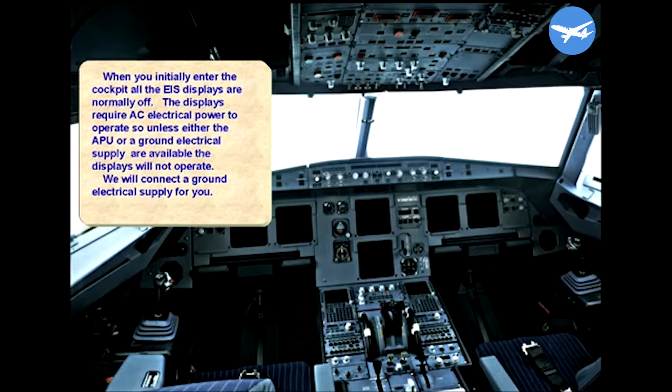Normally, the Ecam screens are switched on in the order of upper, then lower. For training purposes, let's switch them on in reverse order to see what happens. Switch on the lower Ecam display.

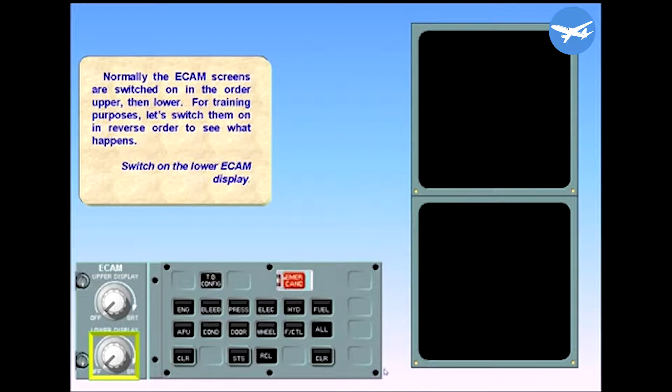Notice that EWD information is displayed on the lower Ecam screen. This occurs because it has priority. Therefore, if there is only one Ecam screen available, the engine warning display information will be displayed.

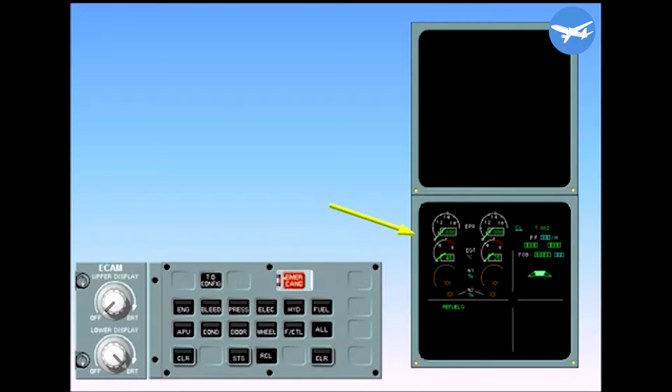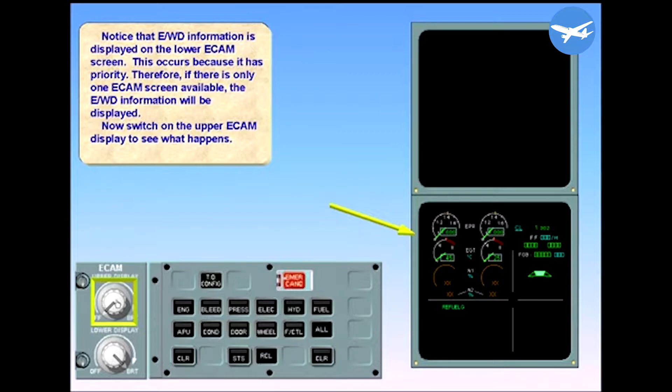Now, switch on the upper Ecam display to see what happens. Notice that the engine warning display information moves to its normal position on the upper Ecam screen, and the door oxy system page is displayed on the lower Ecam screen.

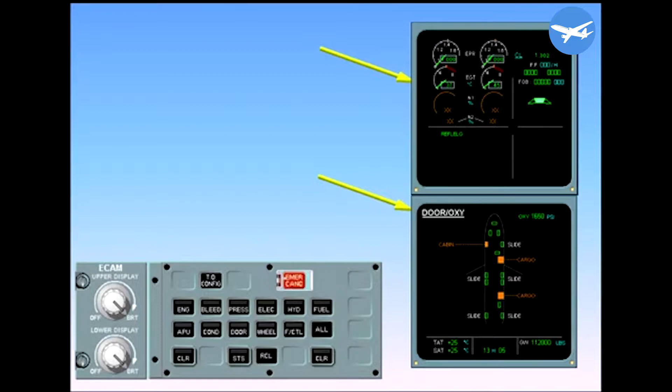The door oxy page is what the Ecam system will automatically display because you are on the ground with the doors open. The memo area of the engine warning display has a message telling you that refueling is taking place.

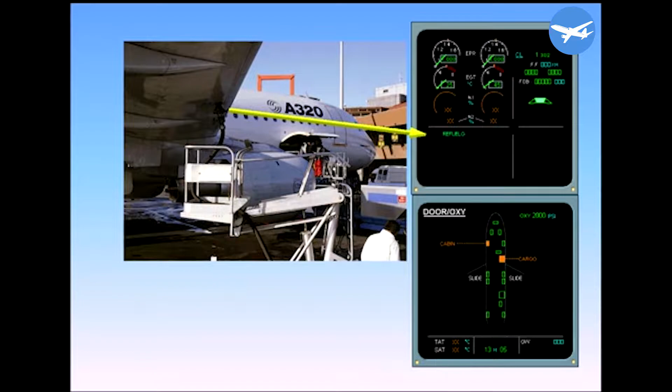We will now start the APU. When the APU master switch is pushed on, the APU Ecam page automatically appears. Next, the start switch is pushed, and the APU begins its automatic start cycle.

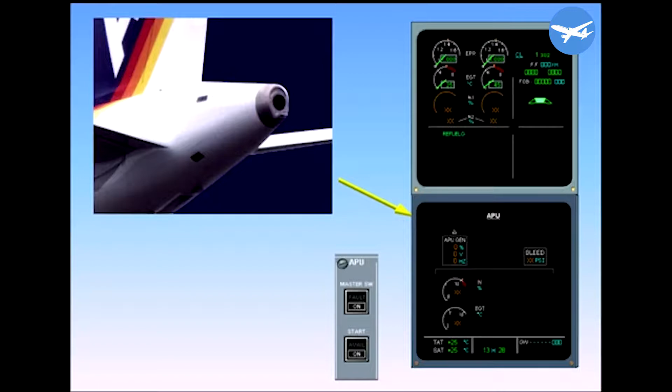Note that there is no light on the Ecam control panel APU push button because the APU page has been automatically called as part of a normal sequence. The APU is now running as evidenced by the avail light on the APU start push button.

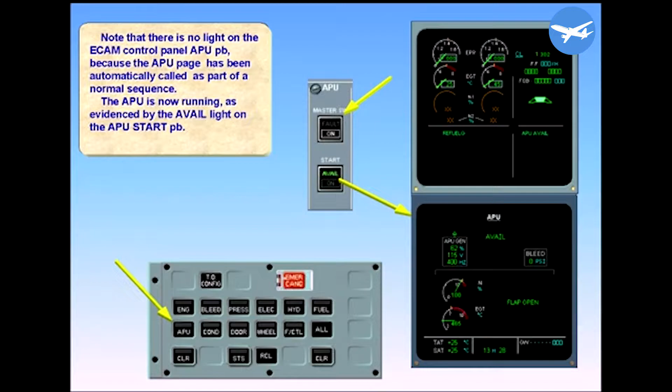Shortly after the APU start is complete, the Ecam door oxy page is automatically recalled.

During the pre-flight, one of the things we do is check fluid levels. For example, the quantity levels for hydraulic fluid and engine oil. The required system pages are manually called by pressing the associated key on the Ecam control panel. Let's call the Ecam hydraulic system page.

The Ecam hydraulic system page is displayed. Notice that there is a light on the hydraulic key on the Ecam control panel to indicate that it was manually selected. You will do the fluid level check in the hydraulic module, so let's see how to return to the Ecam door oxy page.

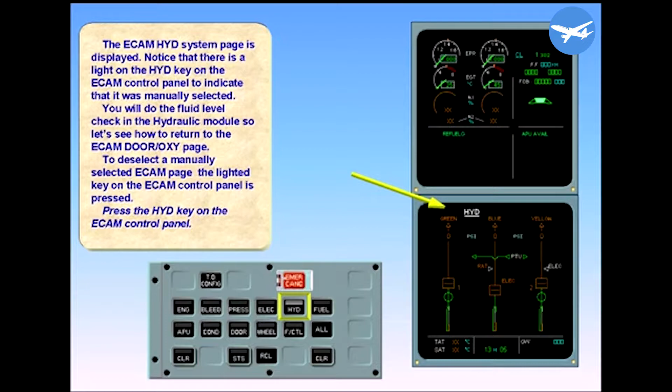To deselect a manually selected Ecam page, the lighted key on the Ecam control panel is pressed. Press the hydraulics key on the Ecam control panel. The Ecam door oxy page is displayed, and there are no lights on the Ecam control panel. Remember the lights out philosophy.

The next action is to press the recall push button on the Ecam control panel for at least 3 seconds. Pressing this push button recalls any warnings or cautions that have been cleared since the last power-up.

Since we are starting the aircraft from cold, a normal memo will be seen on the engine warning display because there is nothing to recall. If we were on a turnaround, the display would recall any warnings or cautions that had occurred on the previous flight. In this example, a canceled caution concerning the digital flight data recorder has been recalled. You will see how a caution is canceled in the Abnormal Operation module.

At this point, the passengers have boarded, the doors have been closed, and the slides armed. On the Ecam Door Oxy page, observe that there are no amber indications and that there are 6 white slide indications.

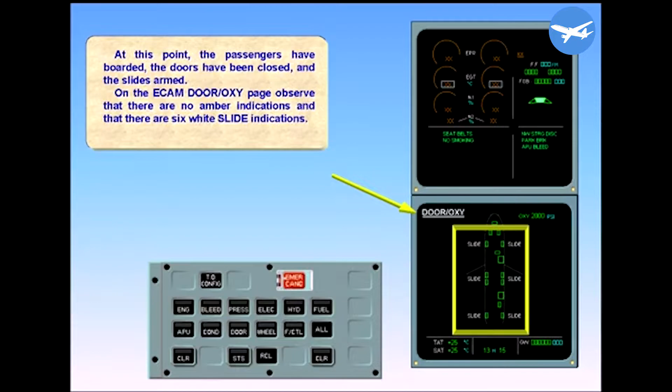When the ground personnel attach a tow bar to the aircraft, they disconnect part of the nose wheel steering system. The Ecam system will detect this and provide a green memo indication, nose wheel steering disconnect. Let's start the engines.

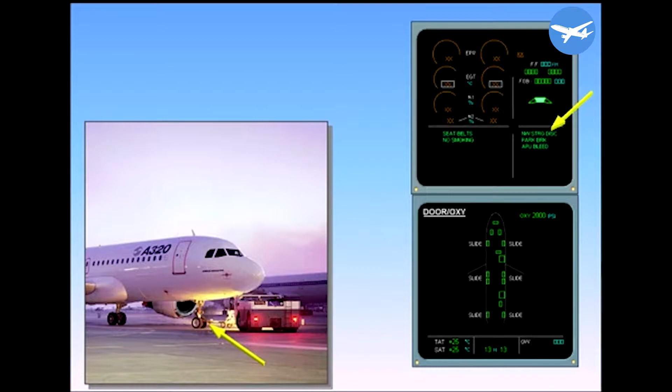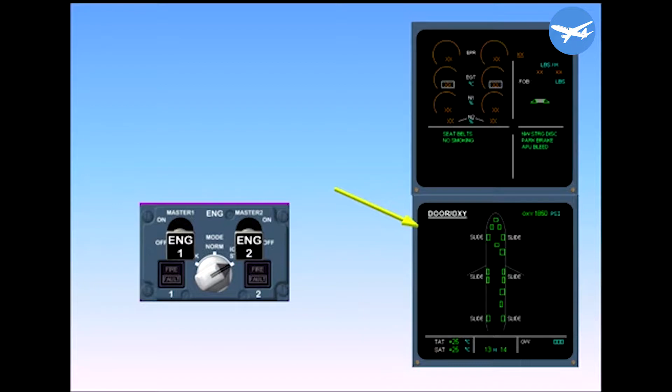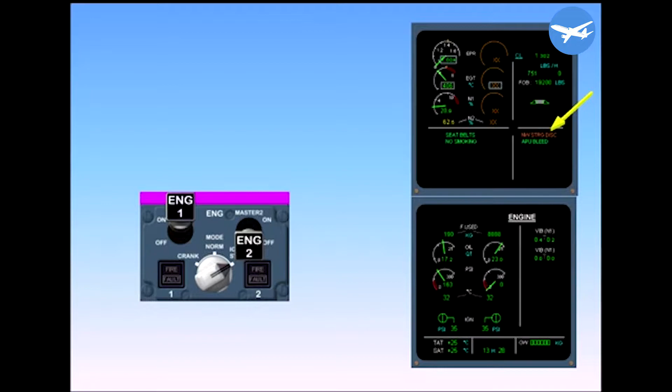The Ecam system will automatically display the Ecam engine page while the engines are being started. Notice that as soon as the first engine is running, the nose wheel steering disconnect memo changes to amber. This happens because Ecam has detected that you are capable of taxiing, but you have the steering disconnected.

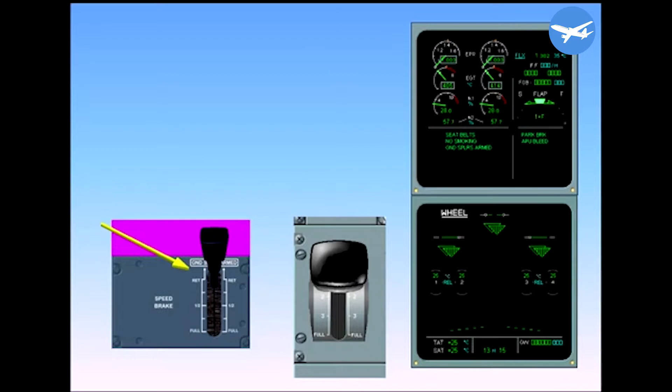When we arm the ground spoilers, a white band appears on the spoiler handle, and a memo appears on the EWD showing that the ground spoilers have been armed. Also note that the flap indicator has changed to show the takeoff flap setting.

Another part of the after-start check involves checking the status page. Since there is no status reminder at the bottom of the EWD, the status page obviously is clear.

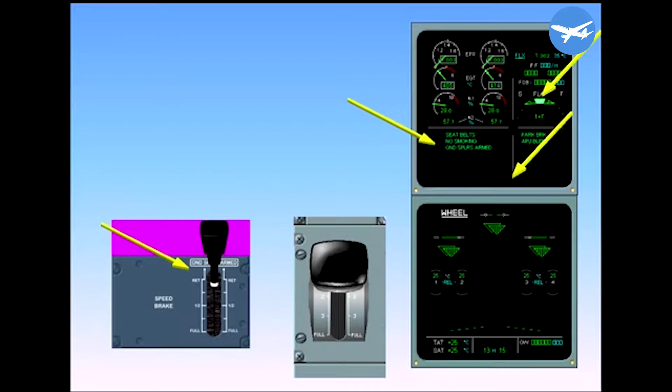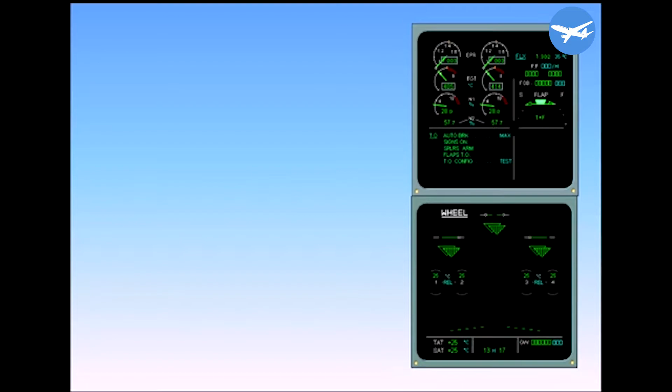Approximately 2 minutes after the second engine has been started, a takeoff memo appears on the EWD. The takeoff memo lists a series of actions to be performed before takeoff. In this example, there are blue action items remaining, specifically setting the auto brake to max and the takeoff configuration test. We will set the auto brakes to max for you.

The blue action item has changed to green. Auto brakes have been armed to max. The final item requires testing the takeoff configuration. This is done by pressing the takeoff configuration key on the Ecam control panel. Select the takeoff configuration key.

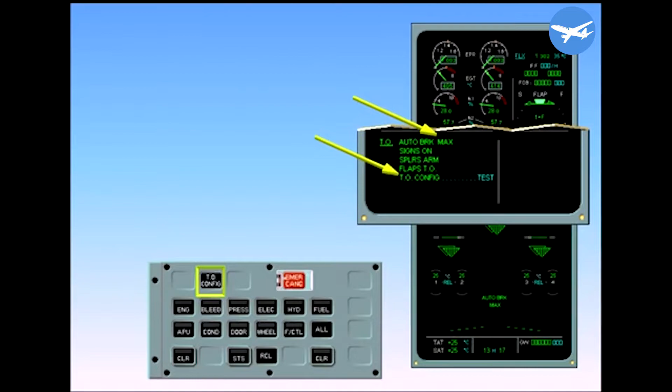Pressing the takeoff config key simulates the application of takeoff power. If the aircraft is not in a takeoff configuration, for example, flaps not in the correct configuration, then an Ecam warning or caution will be triggered. The system also checks the side sticks and the flight control computers for faults.

Provided Ecam detects that the aircraft is in a normal configuration, then the takeoff configuration memo changes to normal. Observe that there are no blue action lines on the EWD.

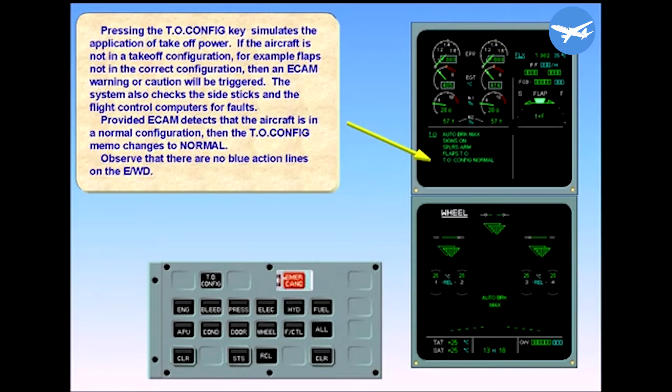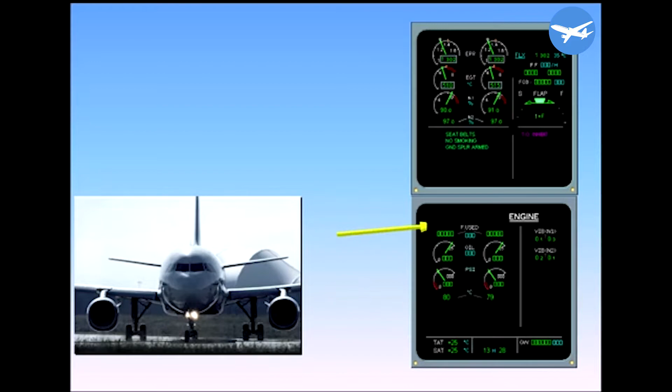We are now at the threshold about to take off. When the engines are set to take off thrust, the Ecam engine page is automatically called. On the engine warning display, notice that the takeoff memo is replaced by normal memos.

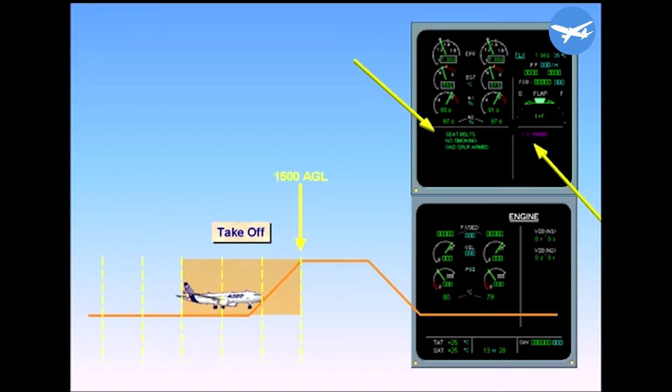A magenta takeoff inhibit message has appeared. The takeoff inhibit message is advising you that some warnings and cautions have been inhibited during the takeoff phase.

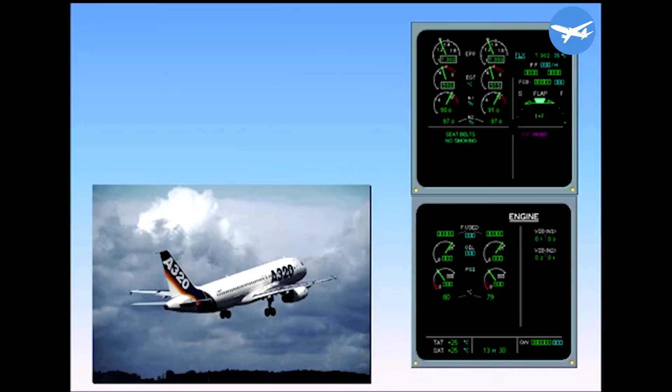The aircraft is now airborne. After passing 1,500 feet AGL, or 2 minutes after liftoff, the takeoff inhibit ceases and the memo is removed.

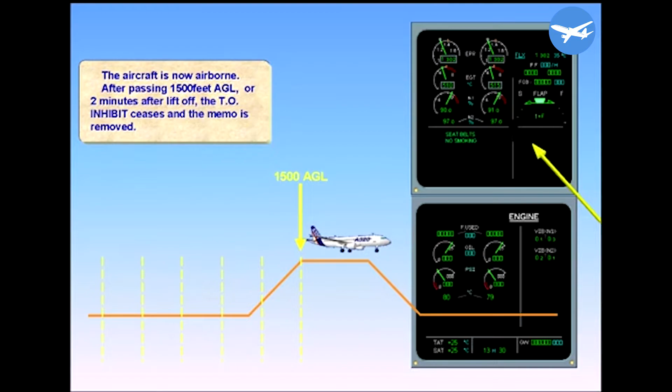When the flaps are fully retracted, the ECAM engine page is automatically replaced by the cruise page. When established in cruise, the system pages are periodically reviewed.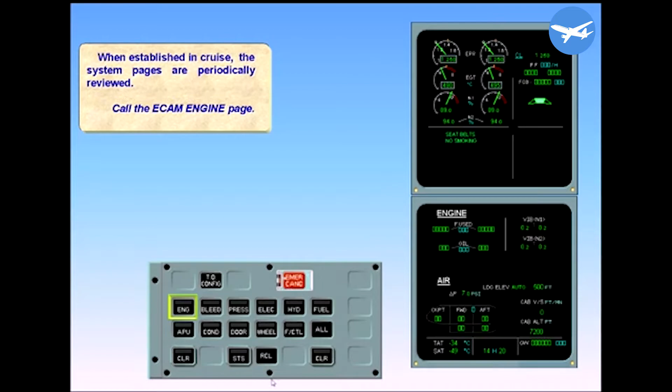Call the Ecam engine page. Notice that while the engine page is displayed, the corresponding light on the Ecam control panel engine push button is illuminated. You will study the indications on the system pages in the appropriate modules.

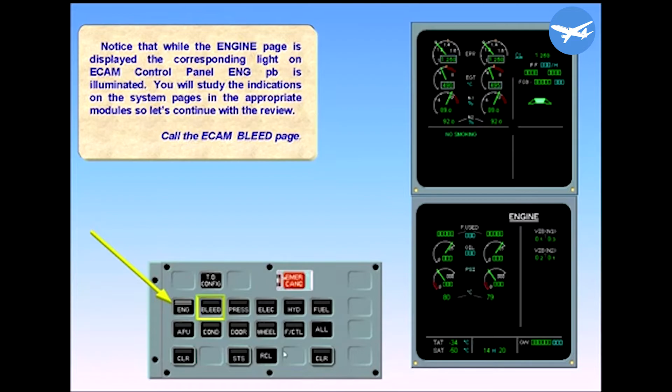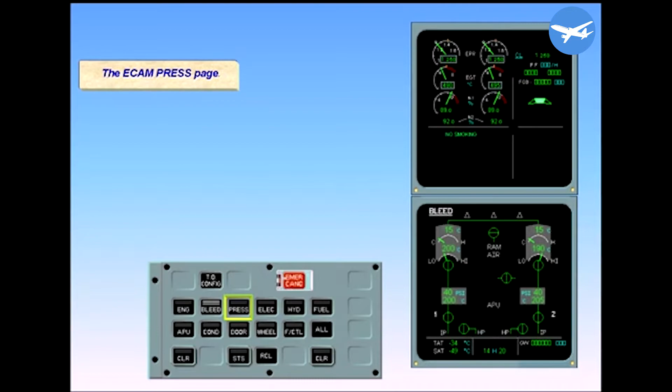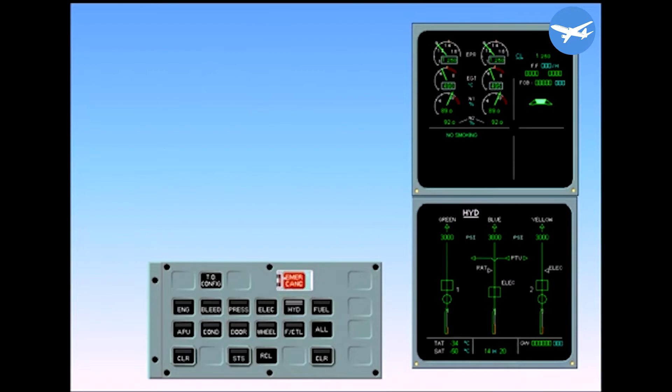So let's continue with the review. Call the Ecam bleed page. The Ecam pressure page. The Ecam electric page. The Ecam hydraulic page. The Ecam fuel page. The Ecam APU page.

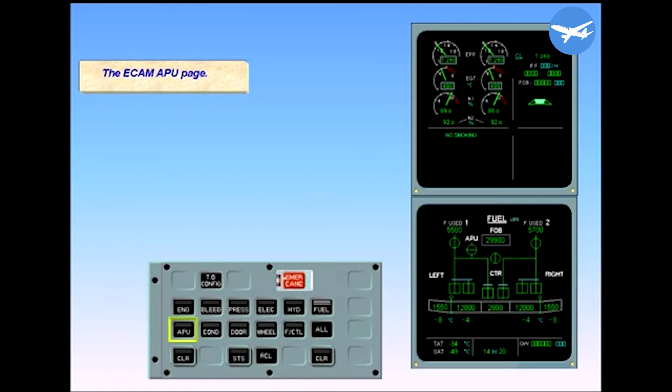Notice that there are amber indications on the APU page. Because the APU is shut down, these are acceptable for this stage of flight.

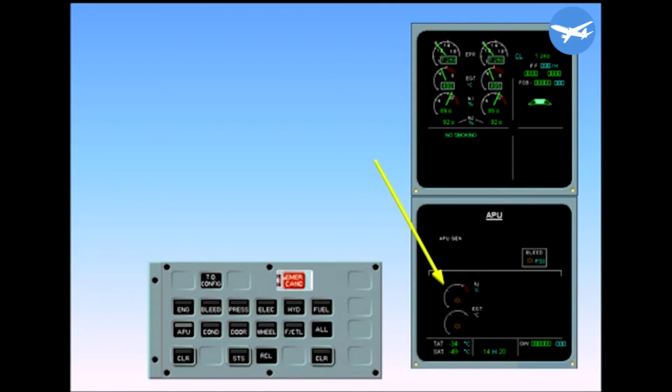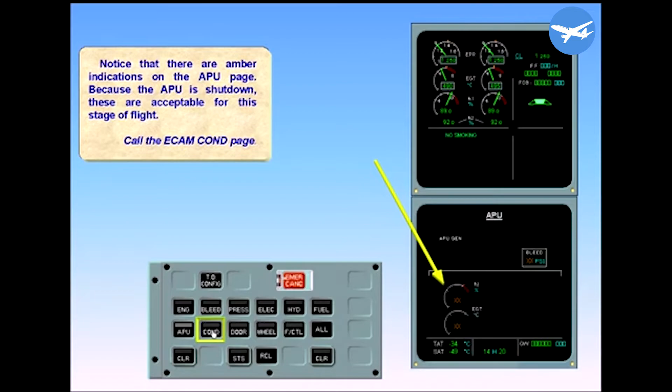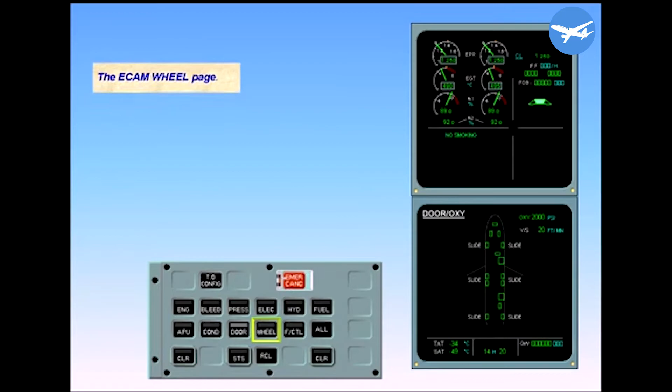Call the Ecam conditioning page. The Ecam door oxy page. The Ecam wheel page. The Ecam flight control page.

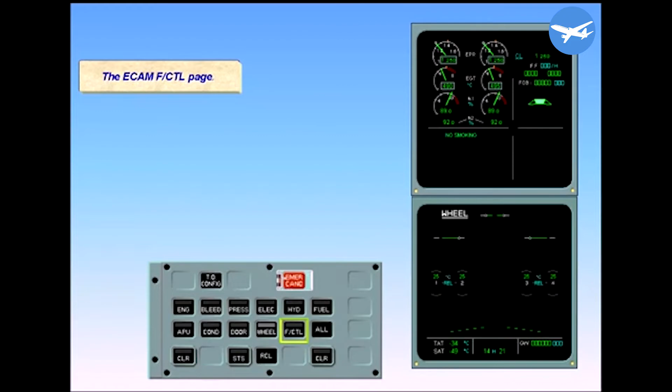After reviewing the flight control page, the cruise page can be recalled. Notice that there is no push button to select the cruise page. You have to deselect the manually selected page. Recall the Ecam cruise page.

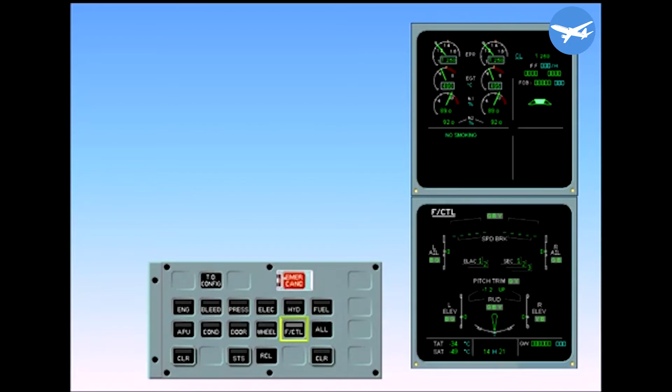The cruise page is displayed and the ECP has no lights illuminated. As an alternative to selecting the individual system keys, the All key can be used to sequence through the system pages. You will do this in the Ecam Abnormal Operation module.

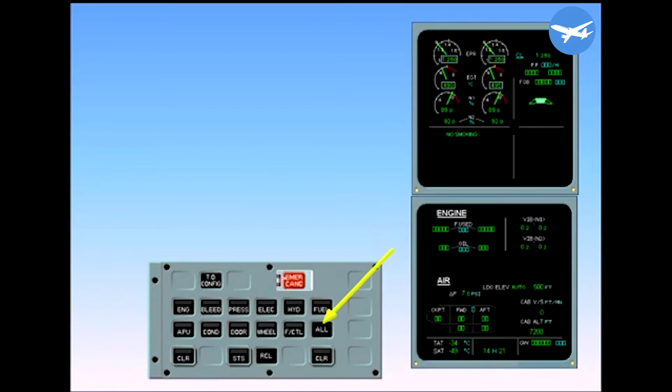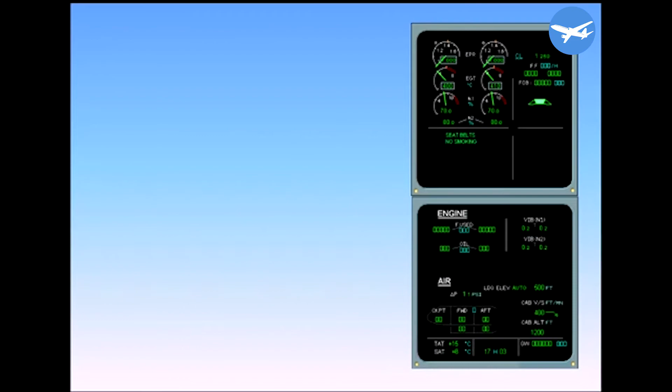We will now establish a descent for landing at our destination. As part of the approach checks, the status page is checked. Since there is no status reminder on the EWD, the status page is normal.

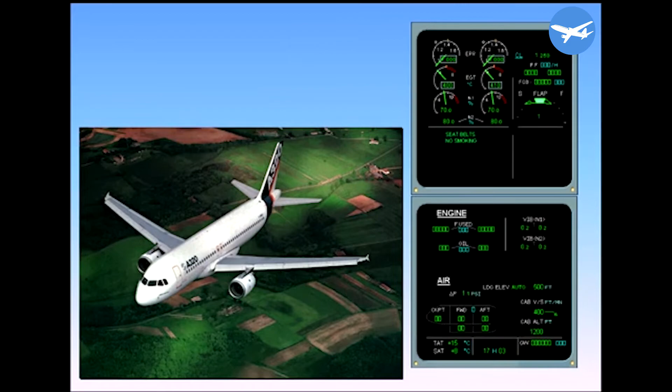The aircraft is lined up on final approach. As the landing gear is extended, the Ecam system will automatically display the wheel page. The wheel page is displayed to provide information useful for the landing, for example, brake temperatures and spoiler deployment.

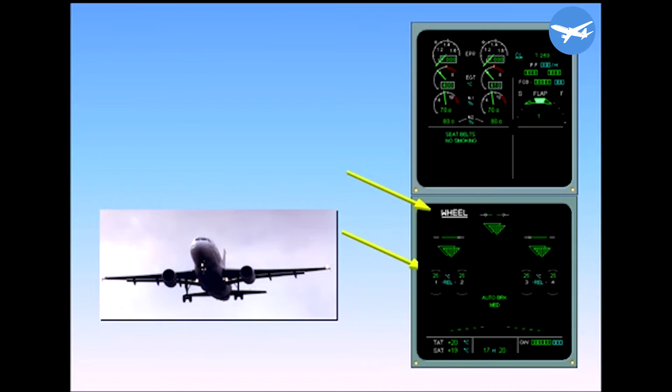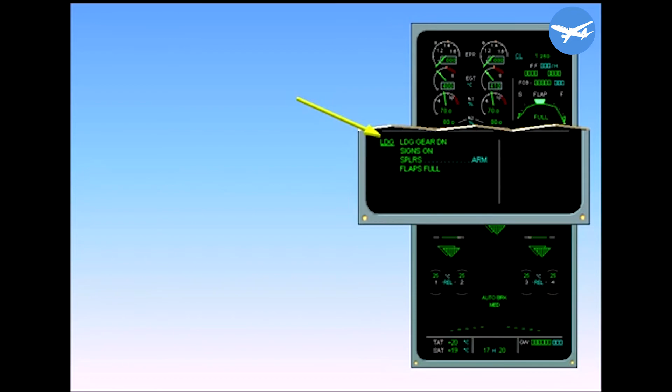On passing 1,500 feet with the gear down, a landing memo appears on the engine warning display. On modified A320s and on all A319s, the landing memo appears at 2,000 feet. Note the blue action item reminding you to arm the spoilers. We will arm them for you.

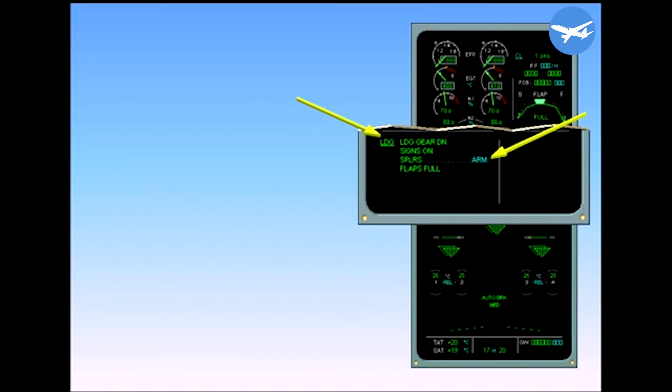The blue action line is replaced by a green action completed indication. Notice that there are now no blue action lines outstanding.

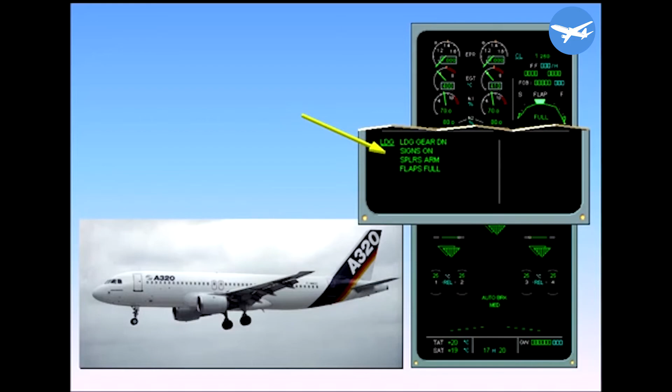At approximately 800 feet, the landing inhibit becomes active, and this is indicated by a magenta memo. The landing inhibit message is advising you that the vast majority of warnings and cautions have been inhibited during the landing phase.

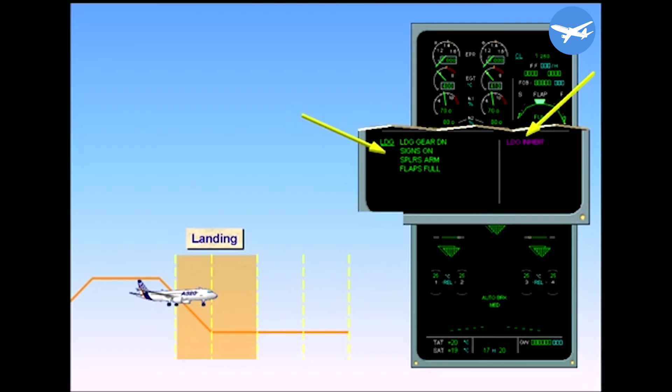At engine shutdown, the Ecam door oxy page is automatically recalled so that you can check slide disarming. Notice the pulsing status message on the EWD. This is telling you that there is a maintenance-related message on the status page that you have not seen.

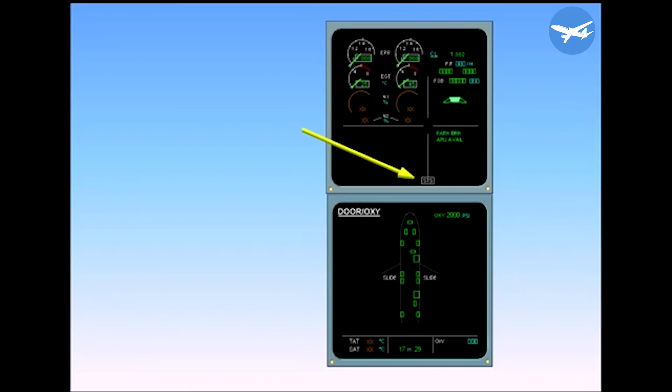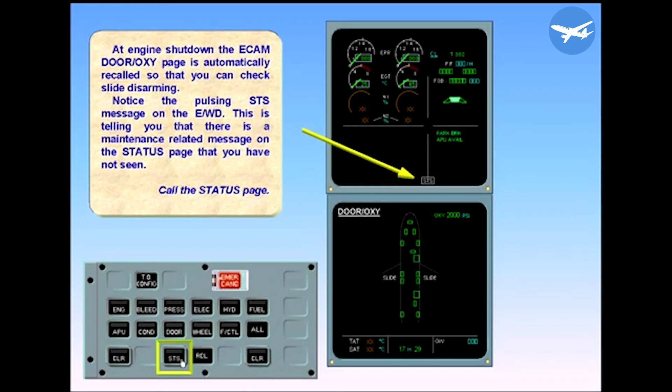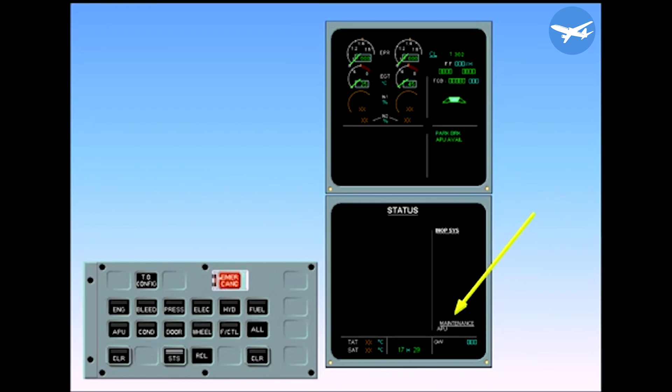Call the status page. There is a white maintenance status message at the bottom of the status page. This message is an indication for maintenance personnel that a system requires a maintenance procedure at the next program servicing. It does not mean that the aircraft is unserviceable. Clear the status page.